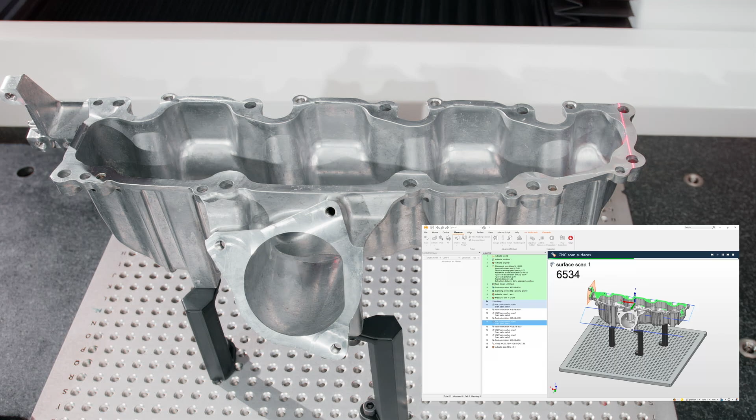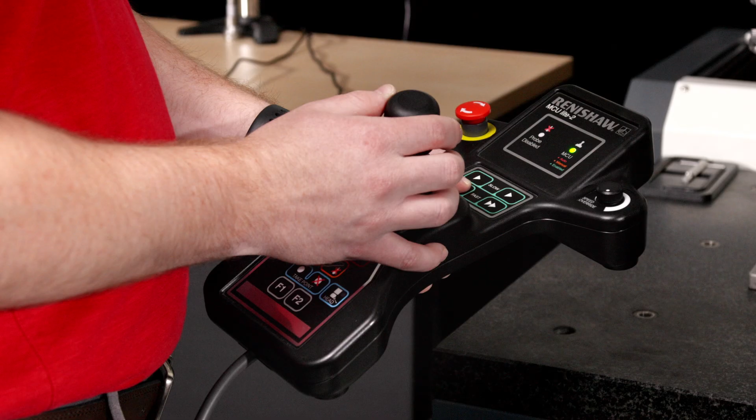3D scanners can be a valuable addition to your CMM toolset to increase measurement efficiency. Their high resolution, fast data acquisition and accuracy, combined with the CMM's automated measurement process, can make quick work of surface inspection. PolyWorks Inspector 2025 expands support for laser scanning on CMMs with Renishaw controllers and increases the range of supported 3D scanners with the latest Kreon and LK models.

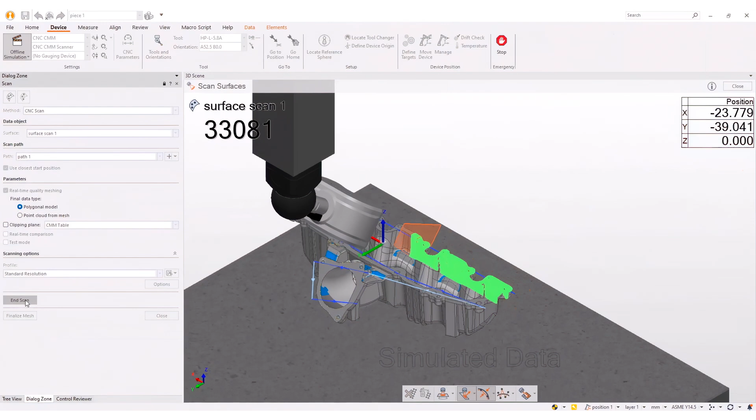To simplify scan path programming, this new release allows effortlessly setting the ideal laser scanner orientation using the CAD model surface while previewing the laser plane. Also, you can reuse a scan path with a different starting point to quickly create additional scans, speeding up measurement coverage and inspection sequence creation.

I hope you enjoyed that, and maybe it got you thinking about adding a 3D scanner to your CMM tool changer. Now let's move on to portable devices. As technology advances, new measurement devices are being introduced to address the manufacturing industry's needs. Think about challenging large-scale measurements like body-in-white or aerospace fuselage components. This year, we've developed plugins for these new long-range devices, enabling you to combine probing, non-contact probing, and scanning measurements within the same part inspection, giving you the true PolyWorks advantage. Let's watch the video and discover more.

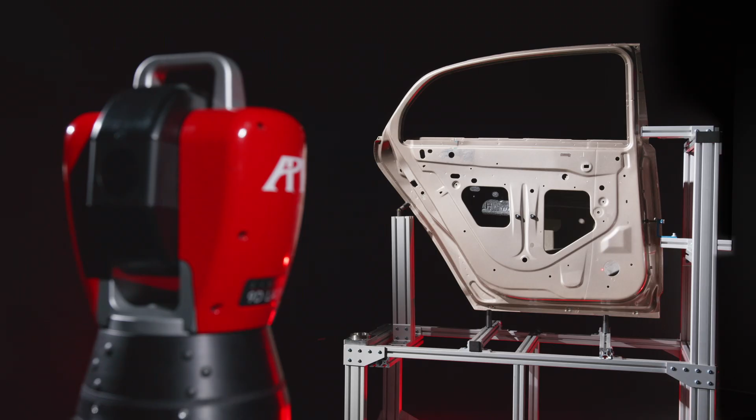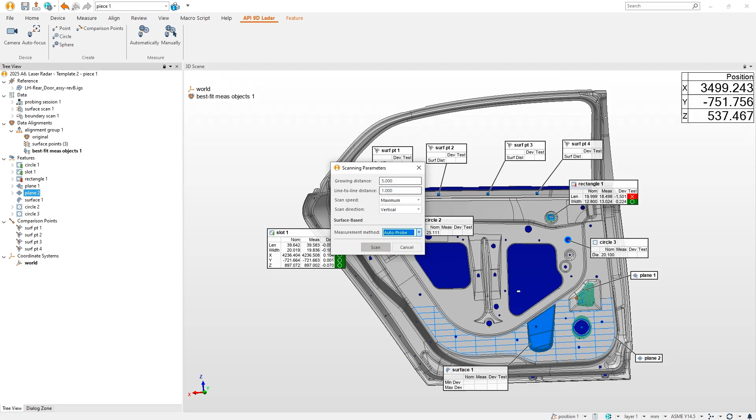PolyWorks Inspector 2025 offers new plugins for the Leica ATS-800 laser radar and API 9D Ladar devices. This enables the use of these devices as hybrid non-contact measurement tools that seamlessly combine single-point probing and surface scanning. These capabilities allow building assemblies or inspecting parts with real-time measurements displayed in a digital readout, measuring features using predefined measurement points, probing surface points alignments, and scanning freeform prismatic surfaces.

Also, the new plugins use the programmable measurement execution capability of these devices to automate single and multi-piece inspections within the sequence editor.

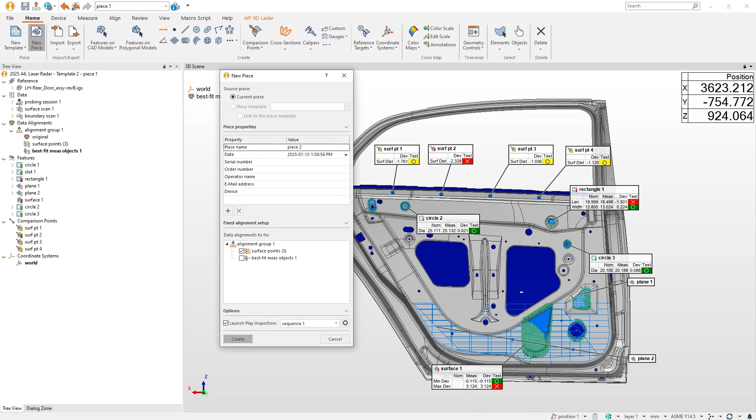I hope the last two videos gave you ideas on how you could enhance your acquisition workflows. In today's market, more complex designs plus competitive goals to reduce time to market are really driving the need for dimensional inspection processes to evolve. While our new plugins for new devices cover the data acquisition part of the process, there is an urgent need to enhance every step of the dimensional inspection workflow, from measurement process setup to measurement execution, and finally the reporting and the analysis. Our goal is clear: to optimize all your workflows for maximum efficiency.

And this includes not only addressing key improvements, but also accelerating software performance and introducing innovative solutions to streamline your processes. Our product manager Simon Héroux will now present enhancements to the measurement process setup. Over to you, Simon.

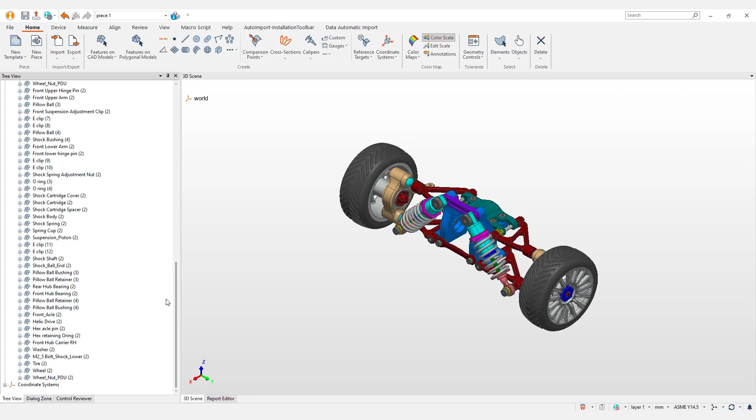Working with a complex CAD assembly consisting of multiple sub-assemblies and part instances can make measurement process setup very challenging. Simple tasks like hiding or ignoring a CAD component are arduous and time-consuming due to the large number of objects displayed in Inspector's tree view. PolyWorks Inspector 2025 lets you obtain the complete assembly structure and hierarchy when importing CAD assembly files.

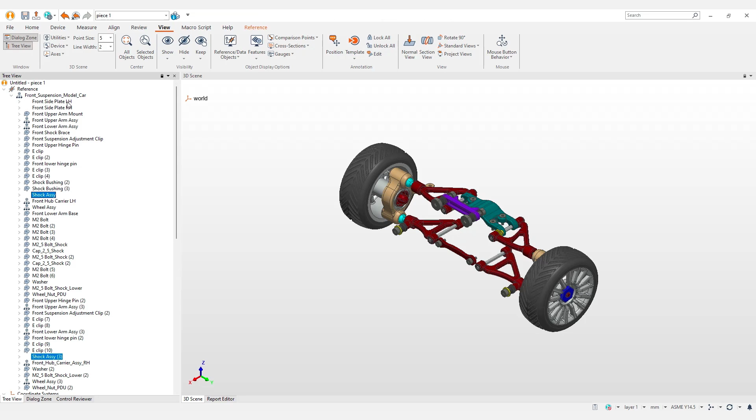The assembly tree provides an organized structure for efficient navigation and identification of critical components in both your assembly and sub-assembly. Further, the clearly defined hierarchy paired with Inspector's easy-to-use tools makes visualizing and managing components quick and easy. These enhancements facilitate an efficient workflow for your measurement process setup and review.

Additionally, you can easily reuse a subassembly of larger assembly files already imported in PolyWorks Inspector to create new inspection projects without having to re-import the CAD file and start from scratch.

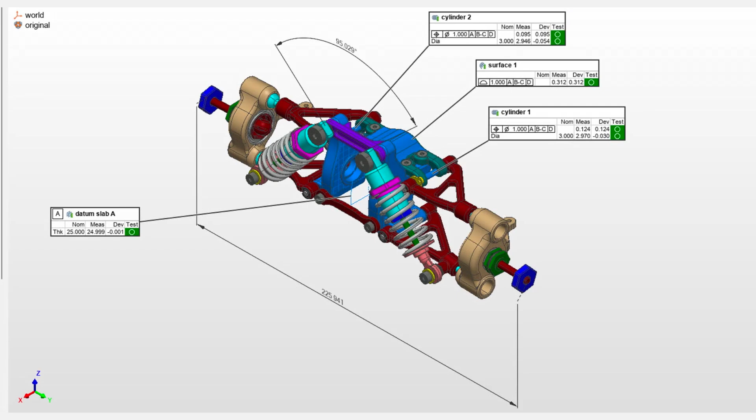Simplify your measurement process with efficient CAD assembly management. This new way of handling assemblies within Inspector will open the door to exciting new possibilities in the future. Now, back to our solutions for improving CNC CMM application.

One of the most valuable features for CMM users in PolyWorks Inspector is the no-code approach to developing CMM programs. Here, our assisted sequencing technology helps to automate the creation of measurement sequences using an optimal measurement path. But working with intricate and complex features remains challenging. Since our goal is to automate CMM programming while keeping you in control, let's see how we have improved this experience in the next video.

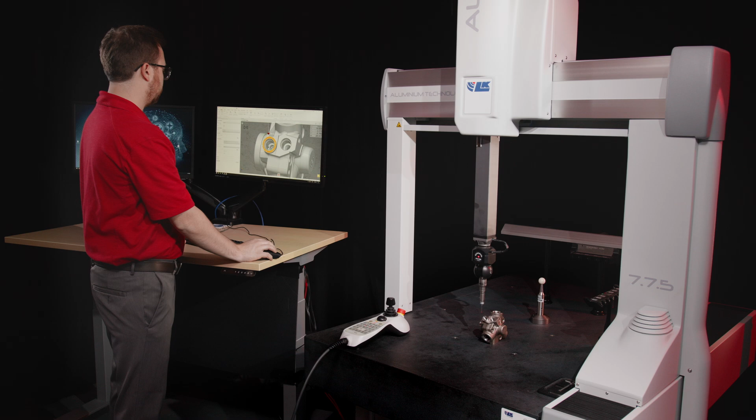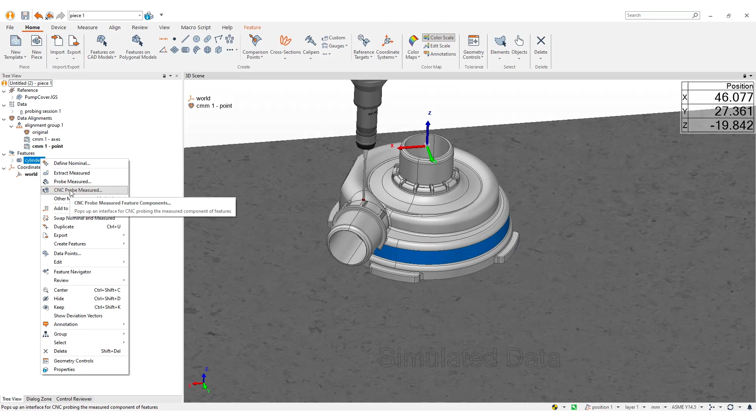Creating a CMM program for small and intricate features on complex CAD surfaces can be challenging. Programming for trimmed or very narrow features could require manual adjustments. PolyWorks Inspector 2025 automates the measurement setup of these features during inspection programming. It intelligently adjusts the exclusion distances to ensure feature measurability,

places measurement points on trimmed features such as cylinders, cones, and spheres, and reduces the approach and retract distances on narrow cones. These improvements eliminate manual adjustments and ensure feature measurability regardless of size or complexity.

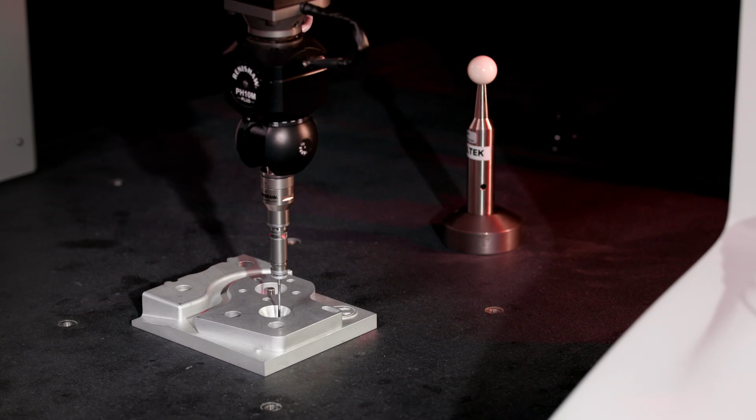Those are some key highlights that we showcase to improve the measurement process setup. Now, I'd like to hand the mic over to my colleague, Product Manager, Roberto.

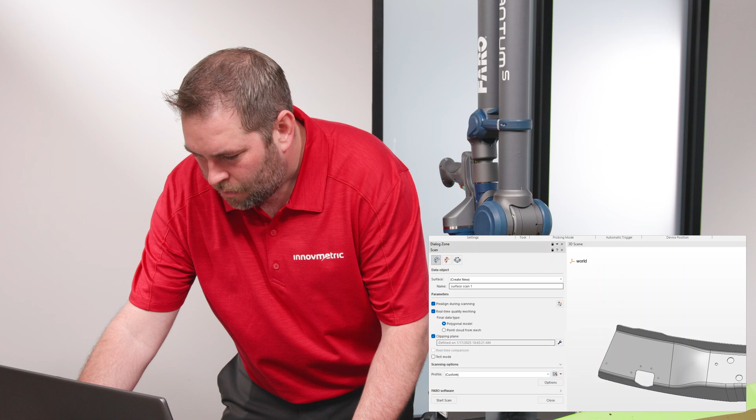So what do we bring in 2025? A new technique that offers you a robust alignment and operator guidance right off the bat when you begin scanning. Let's watch the video and see. PolyWorks Inspector remains a market leader in 3D scanning-based inspections, owing to continuous innovations that help you increase your productivity.

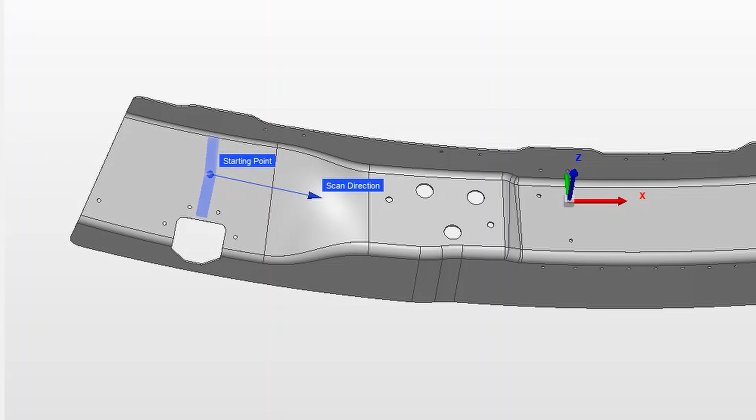The 2025 release introduces a new pre-alignment feature that takes minimal user input to enable laser scanning within the coordinate system of the CAD model. Specify the scanning direction and your laser scanner is instantly aligned with the CAD model. You can now measure parts in an uninterrupted scanning workflow.

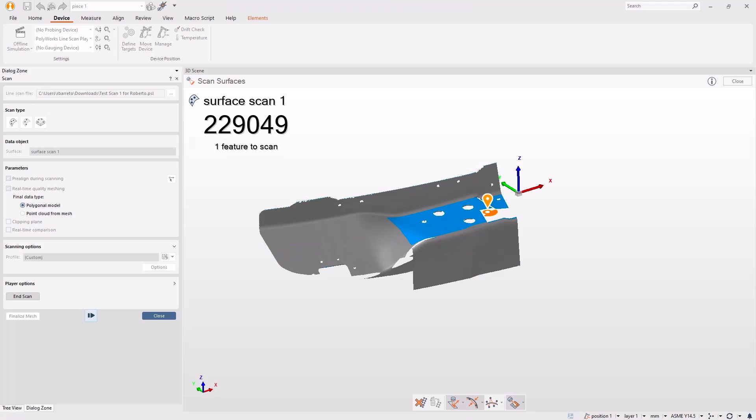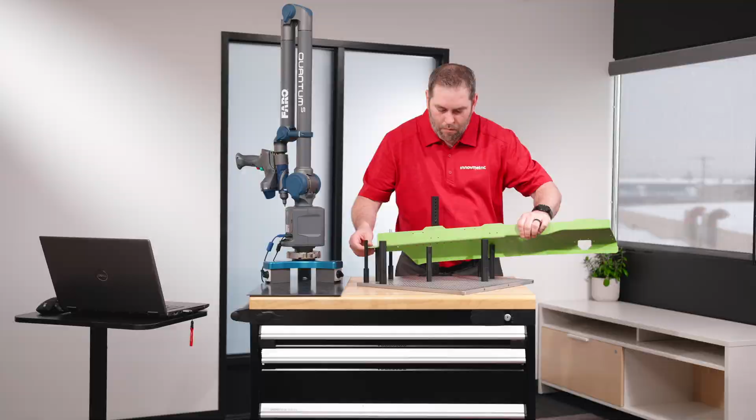After the first scan passes, you are automatically guided to ensure sufficient scan data coverage for all measurements and obtain real-time feedback on scan data quality. The productivity gain further increases with multi-piece inspections. The automated pre-alignment guarantees the repeatability of the measurement workflow, even when not using fixtures or fixed setups.

That new quick alignment is going to work well, whether you have a fixed setup with a fixture or are simply putting the part freely on the table. This year, we also look at our measurement reports. They are used to share findings from dimensional inspections with manufacturing teams who use them to take corrective actions.

But what is actionable data exactly? Take your pass-fail information, for example. It tells you if the part or feature is good or not, but a simple go, no go doesn't give you enough information to correct the problem. Concerning GD&T controls, you asked us for more direct, actionable information. Let's look at what we have on offer in PolyWorks Inspector 2025 to gain better insights to share with manufacturing teams.

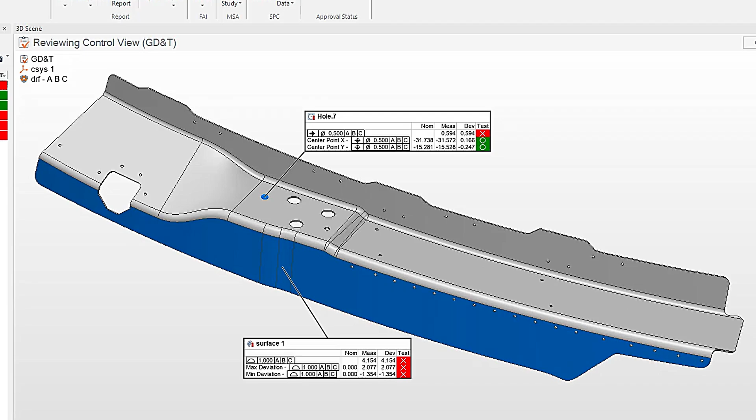Dimensional inspection is used to find where part deviations occur and report their magnitude and direction, empowering manufacturing teams to take corrective action. Beyond identifying features that are out of tolerance, PolyWorks Inspector 2025 introduces GD&T enhancements that make your position and profile results actionable.

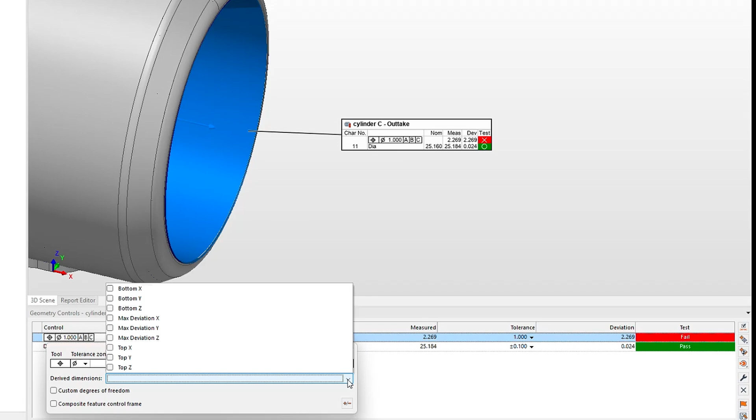GD&T derived dimensions display additional values that describe measured deviations expressed in the datum reference frame alignment. These include the center point coordinates of measured holes, the top, bottom, and maximum deviation coordinates of axial features, and the most in-material and out-of-material deviations and coordinates of surface profiles.

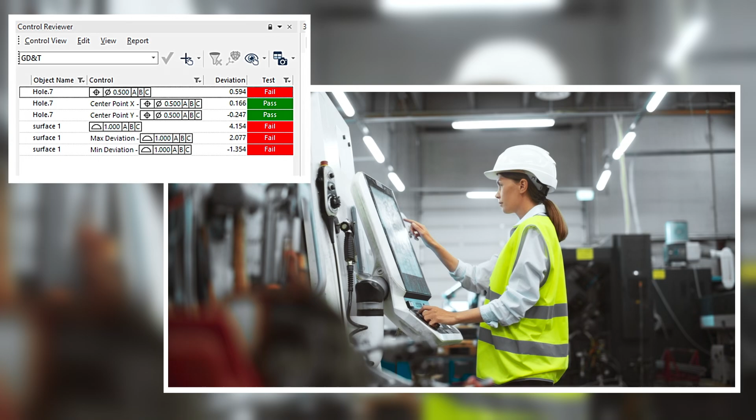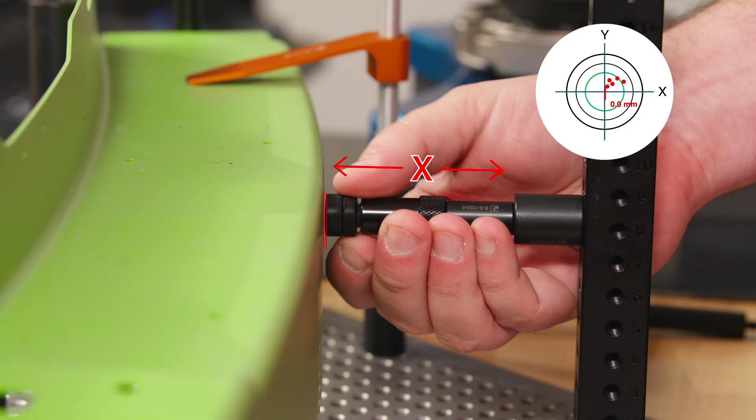These additional values help you understand deviations more completely, enabling the manufacturing team to pinpoint the corrective actions needed. In multiple part measurement, these insights, integrated with the comprehensive SPC toolbox in PolyWorks Inspector, help in identifying the performance of your manufacturing process. A powerful reporting solution is absolutely crucial for effective decision-making in the quality control room.

So that brings us to the conclusion of this session. Today you've seen that PolyWorks Inspector 2025 brings you bridges to the latest measuring devices, whether it's new scanners on CMM or long-range portable devices. You also saw a glimpse of how the latest version will enhance your measurement process setup while dealing with large CAD assembly files and while measuring small and intricate features. You also witnessed a new innovative solution that simplifies your scanning workflows, along with GD&T enhancements that provide deeper insights into your GD&T results. Thank you for joining us today.